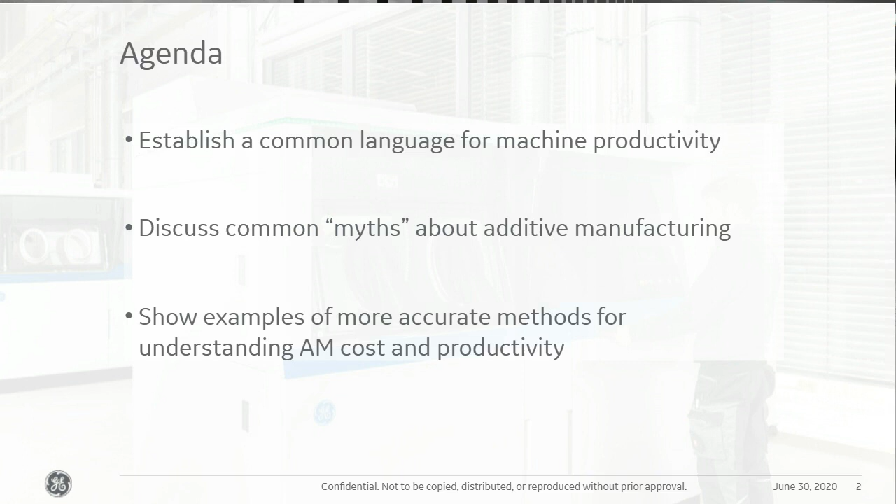So we'll start with a high-level view of the entire discussion. At the end of the day, everybody's here because they want to understand how to create a viable business case using additive manufacturing. A business case can be defined as the justification for making any type of investment, and ultimately what the commercial consequences are. Is it profitable? Does it open up market space? Does it create opportunities that you otherwise didn't have in your current business arrangement?

Those business cases are the thing that we really focus a lot of our attention on, but they're really constructed of sort of 3 to 4 major components. And so ultimately you can see here, at the root of it, the core of building a successful business case really comes down to your cost estimation. Coming up with a very accurate predictive model for the cost of additive has been the subject of a lot of discussion and debate for at least the last 5 years, if not much longer than that.

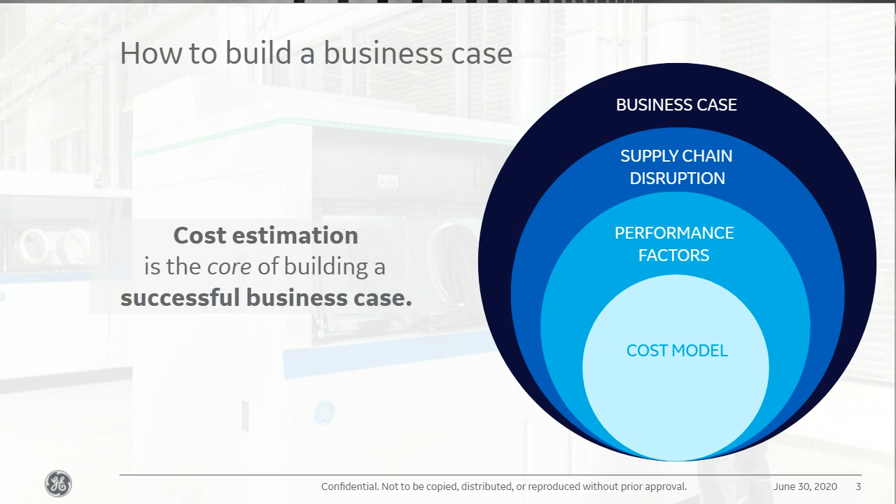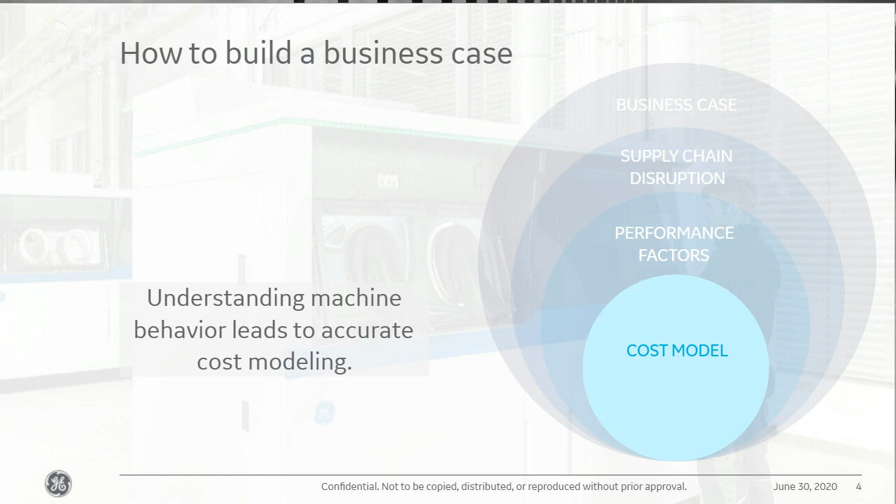So we start at the core. The cost model really is a simple accounting exercise where we take into consideration what the machine is actually doing. This is kind of the open secret about additive manufacturing, and this is true for a lot of things outside of additive: machine behavior is one of the things that really dictates how to estimate your cost. Similar to human economics, we focus on consumer behavior. In the case of machine economics, we talk about what the machine is doing. That's one of the major takeaways of today, and we'll dig much deeper into that as we go.

So let's say that we have a cost model that we believe in the results of, it's been verified, and we have a very complete, comprehensive model. The next thing that we really want to take into consideration are the performance factors.

Ultimately, this can be things like producing a brand new product with new capabilities. That would be, in the case of a derivative, sometimes you can have derivative savings as a change in a product happens. Something in aerospace that we commonly see, for example, is weight. There's a premium paid for weight, and if there's a way to optimize on that, you can actually derive substantial direct cost savings.

But another common thing that we do with additive is we actually increase the life of components. That increased life has a lot of consequences on what your downstream manufacturing and maintenance costs are, and it has a lot to do with changes in your own supply chain if you're able to increase the performance of the part and the life of the part.

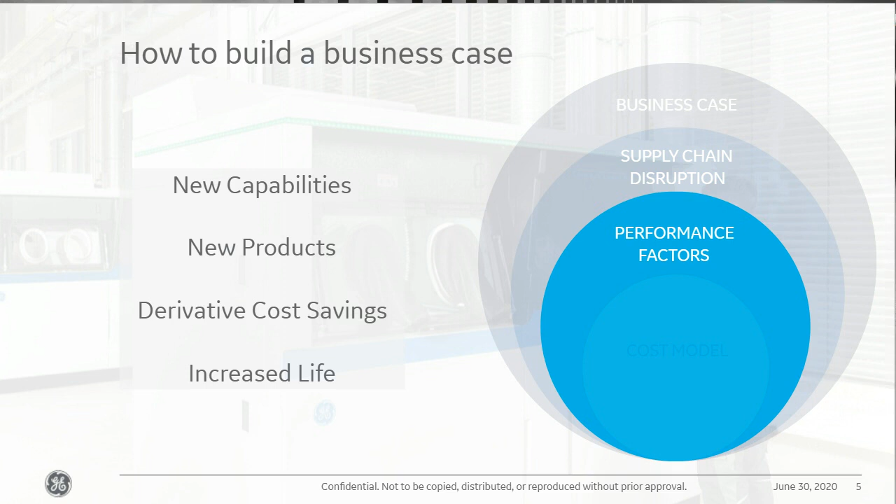Naturally, that segues into a much deeper discussion about supply chain disruption. In the case of additive supply chain, in a lot of ways you're really disrupting the necessity to go out and get tooling made, dies, molds for castings, for example. You start eliminating a lot of the intermediary requirements from the supply chain. You no longer have to go out and source those people, get them potentially months in advance, and have them lined up to actually perform the work that you want to do, especially when we're talking about development.

So another thought here is that with additive, if you do bring it in and decide to vertically integrate, now that you're bringing that manufacturing in-house, maybe you can drastically reduce the scope and scale of your existing supply chain in terms of human resources and capacity.

In some cases, this will be a reduction of warehousing and storage. Sometimes, you've probably read several articles about this, you can actually reduce the amount of obsolescence happening to a product line. You don't have to obsolete products just because you have a tooling piece, a mold, something like that, when the supplier went out of business 20 years ago and you're scrambling to try to find somebody who can replace that component. So additive really can come in and work wonders when it comes to the supply chains for an existing business.

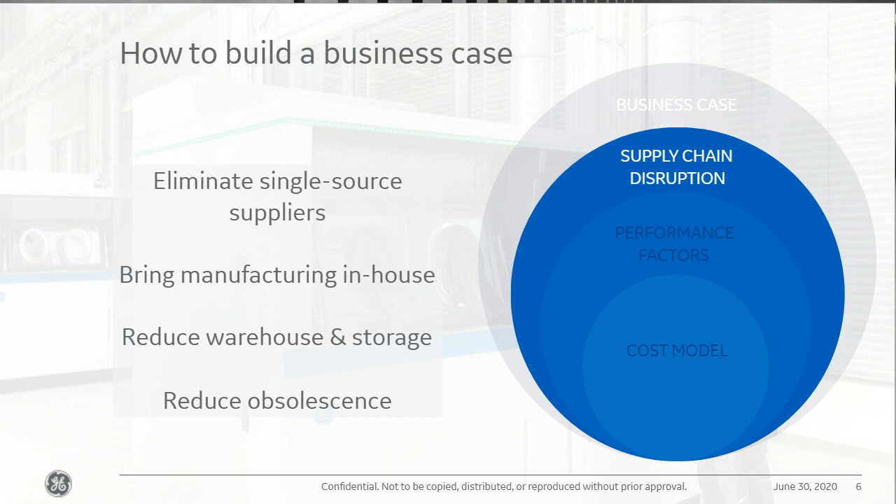But lastly, I think one of the big things we want to talk about is the overarching business case. Why would we even go additive in the first place? It's one thing to say I can estimate my costs pretty well, I can understand the performance changes I've made to my parts by going additive, I can even talk about the substantiation of my supply chain and the changes made there. But ultimately, the business case hinges on what you can do differently from the highest possible level.

So in this case, maybe additive technology is going to be something that puts you into an entirely new marketplace. In some cases, you can actually construct different business models that might be fundamentally different from what you're doing today. In a lot of ways, it'll offer better differentiation, and that's kind of a minimum entitlement. If you've really leveraged additive, you're not just taking a cast part and deciding to print it, even though sometimes that is exactly what you want to do. In many cases, to really get that immediate benefit, you start from the design and work your way up.

So by creating that product differentiation, does that make you more competitive? Does it take you from competing in a red ocean, getting more into a blue ocean, paving the way for new industries rather than simply competing in your current market space?

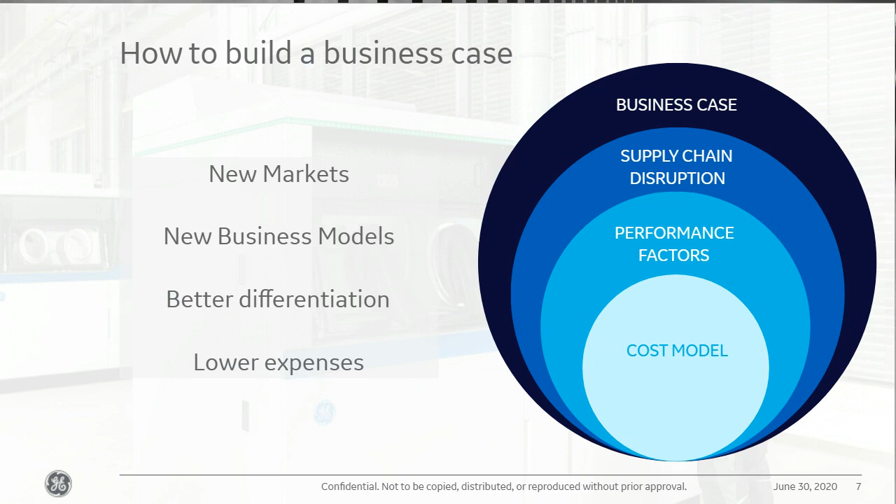So we'll talk about some of the additive machine metrics that you might want to keep in the back of your head throughout this presentation, but ultimately this is something you'll probably want to think about as you start building out your business cases.

So the first one is build time. You'll hear a lot more about the influence of build time on your cost predictions later today, but we want to set the stage and say there's a summary of all these different events happening at the machine that contribute to your overall build time. It's really the summary of all the different scan times that happen on the machine, and that's another deep topic we could cover in another hour. But when it comes to all the different ways the machine actually behaves, we have to sum all of those together and characterize them.

But we also have to do the same thing with the way the powder or filament or anything being fed into the process is being processed. So in the example of DMLM, that could be something like the time it takes to actually recoat each layer, depositing a new fresh layer of powder before you begin the scans.

And ultimately, there are pauses in the process. That's something a lot of machine OEMs are working to eliminate, but sometimes you can't, and sometimes having an induced pause actually results in better part quality. There's a lot happening from a thermal perspective, layer by layer. Because it's a melting and solidification process, there is a transient which requires some time, so sometimes you want to use the pauses to your advantage.

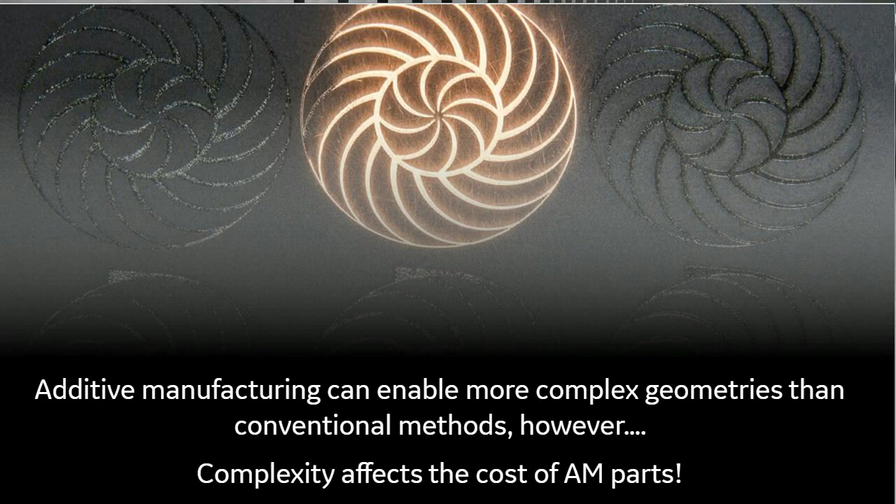So if we really think about it, additive manufacturing can enable more complex geometry. In fact, just point blank, you can print things that you can't make any other way, and that in itself is a super powerful thing. It's something that if you leverage it right, that is the thing that pushes you into a winning business case. But one of the major things to really think about is that the cost of complexity with additive manufacturing does go up as the part becomes more complex. So even though it may absolutely be much more competitive than a traditional process, complexity does contribute to the final part cost when it comes to additive manufacturing.

So we'll kind of walk through some examples here. To try to explain why complexity contributes to the part cost, all additive machines - and this is going to be true for every process, and it's true beyond additive as well - most machines are really just a set architecture, and then they receive a set of instructions on what to do from, for example, a G code or some other type of method where you're inputting the instructions in the machine.

So in this case, we'll refer to them moving forward as themes or parameter sets. You'll hear that commonly if you've ever worked with GE Additive in the past. But those parameter sets and those themes are the thing that really determines how long the machine actually operates. So there's also another side of this - what the contents are of those parameter sets, they derive all of their instructions from the CAD model.

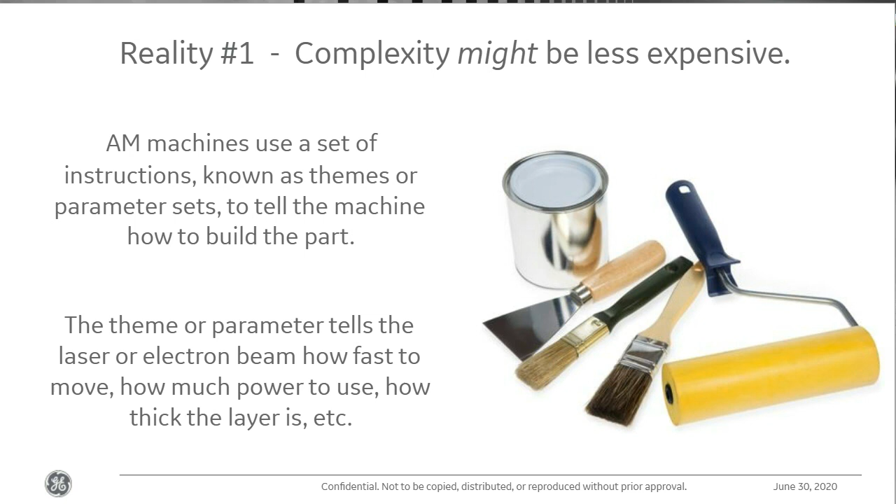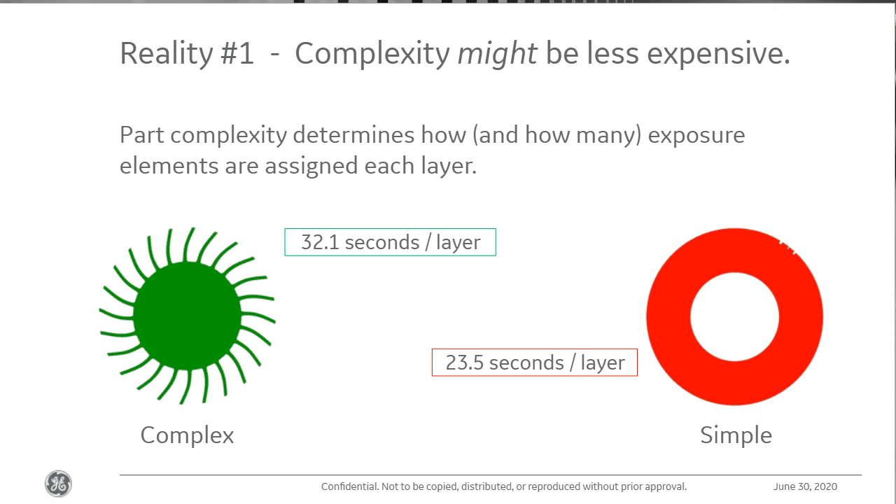So if we think about how complexity is really driving build time, there are at least two major geometric considerations. This is something you can work on at the CAD level, but it's also something you can take with you throughout the entire process. More surface area means I'm exposing more of these contour shapes, or in other words, the more surface area there is, the more I have to pass a laser around the edge of the part. And there's a reason why we do that, and we'll talk about that on the next slide. But if we're talking about really bulky geometry, that's associated to the volume of the part.

So one kind of nice objective way to measure complexity is just a ratio of these two things. If you want to define complexity, this is a great place to start, because you're going to capture how much of the process is biased toward my fine detail, edge pass, high resolution type brush, if you will, versus how much of that is assigned to the roller style brush. So how much faster can I deposit my material?

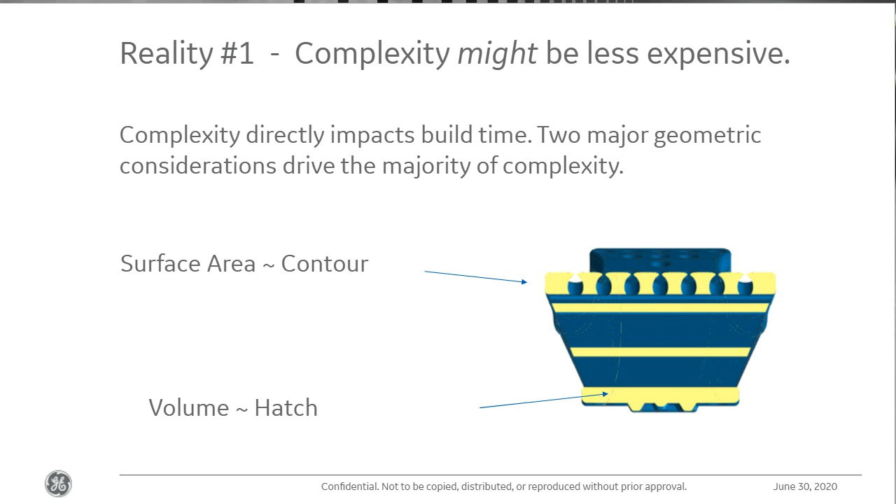So we've talked about the hatch and contour. There are actually up to 24 other exposure elements that happen, associated to different geometry implications, and in some cases, not just the geometry itself, but the interpretation of that geometry. So now we're talking about part nesting, and part orientation, contributing to how complex the geometry is on the slice level. This is kind of an interesting spot, because now we're saying there's actually 24 exposure elements. This is a really difficult problem. How do we really try to understand the implications?

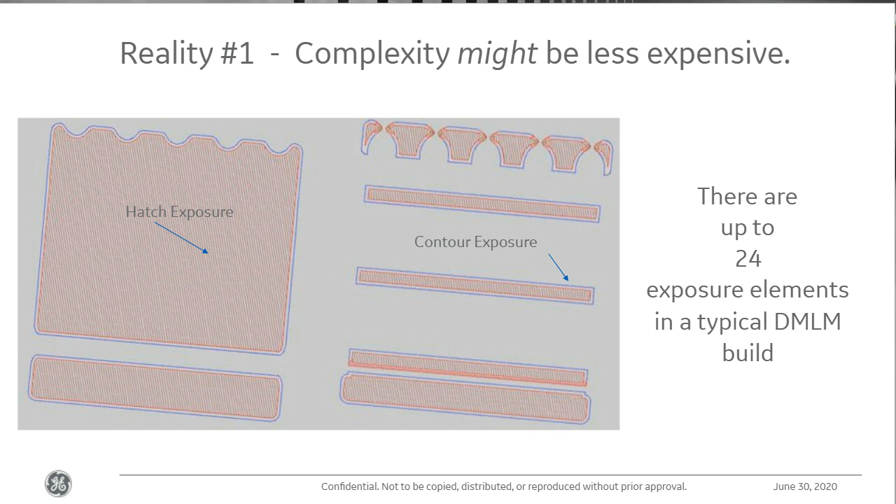Well, say for example, maybe I don't want contours. I see a bunch of surface area, I say, well, what if I just turn those off? Well, you can do that. You certainly can, and there's going to be a bit of an implication, and it's really going to come down to the quality of the surface and really the material fidelity.

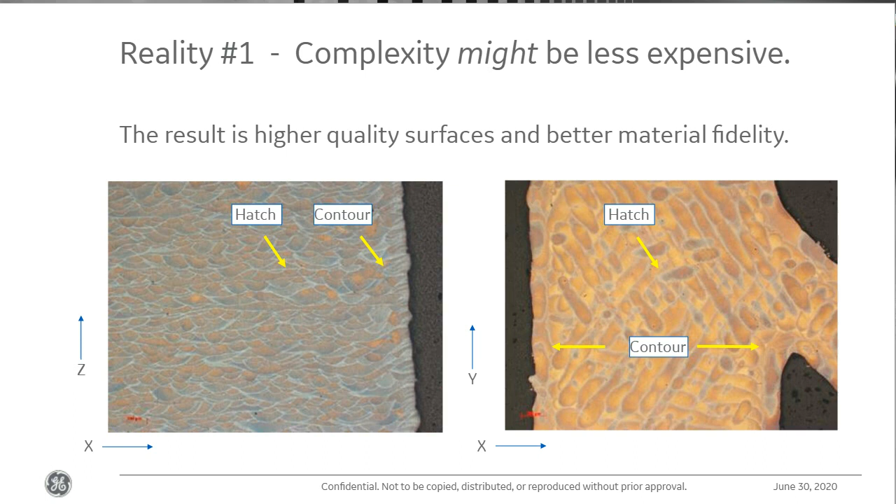If you wanted to make the trade and eliminate those, you can certainly do so, but you should expect that if you start eliminating exposure elements, you're just going to see a reduction in material capability. So most of the time, that's going to manifest itself in terms of fatigue, or in some cases it might be creep. Anything where you have a surface induced phenomenon, you're going to propagate a crack off of a surface. That's what you'd be working with.

So kind of the summary here is that complexity could be less expensive. And it normally is when you're talking about things like a complex forging, casting, machining, something where you're fighting complexity versus a conventional process. But you don't always win with additive just using everything stock parameters, stock machine configurations, that kind of thing.

In some cases, you can really push the business case over the edge by utilizing a combination of reduced material requirements, changing your material parameters so that you can create something that's a little bit more productive, if your industry allows for it. In some cases, the quality is the part that really, really matters, in which case you just have to take into consideration that there is complexity that's going to be inherently in the part, which means that you're just going to have an inherently slower process.

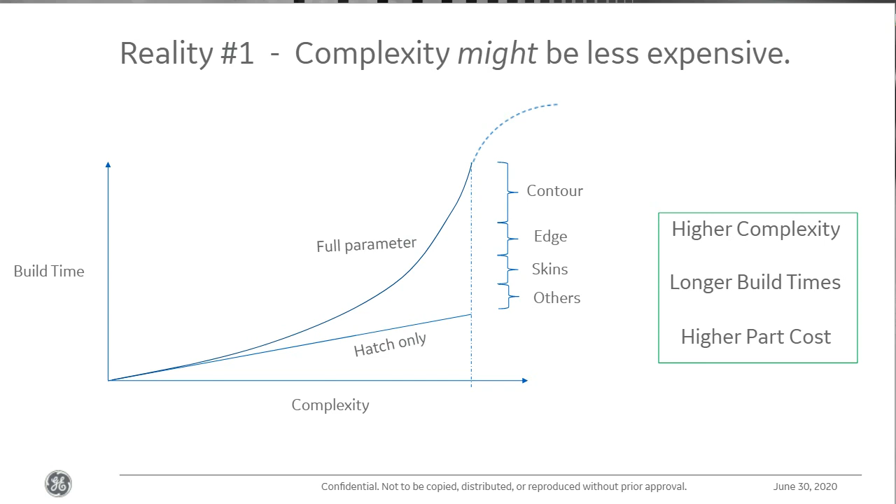Thanks, Nick. All right, so great examples on complexity and understanding whether or not complexity is free, and what that phrase or that myth means. The next phrase or myth we're going to look at is: my machine prints at the quoted entitlement. True or false? My machine prints at the quoted entitlement rate.

So let's take a look at the result for this poll question. A little bit different than the previous here. 14% said true and 86% said false. So once again, Nick, I'll ask you for your thoughts on the results of the poll question.

Yeah, once again, I think we might have a lot of experienced users that have probably run into this problem themselves already. But the quoted entitlement rate in a lot of cases can be something as abstract as simply what my scanners are capable of producing. In which case you're going to see numbers that appear to be super large, and if you're comparing the wrong thing across different machine vendors, different machine technologies, it can be a little bit misleading. And so I think that's one of the major things here - people who understand that this is false, if you've experienced the machine, you've set them up in your factory, you've run them, you've probably already hit this.

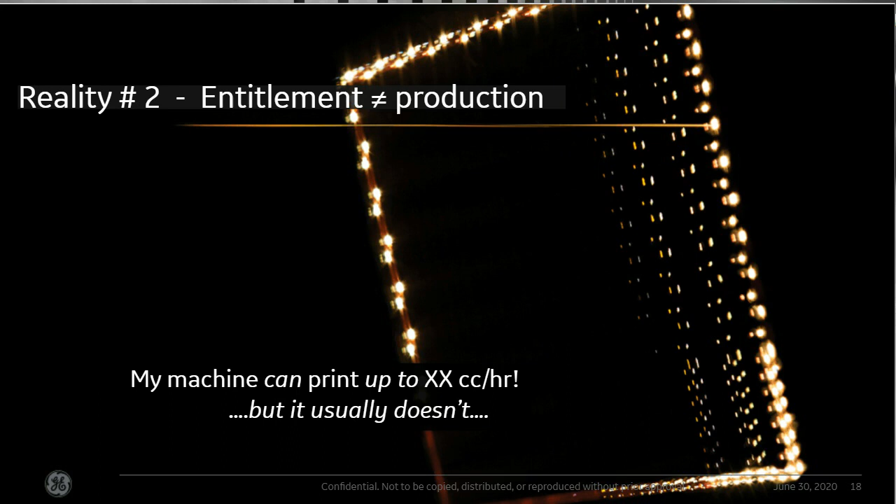So reality number two: entitlement is not the same as production. And that's a sensible conclusion, but let's dig into why, what's really driving that. So you'll often hear a metric - this is in a lot of marketing literature across the board, and it's also a metric that has been used substantially for probably the last decade in additive. But we're talking about a volumetric deposition rate, CCs per hour. So you'll have a lot of people say, well, my machine prints up to 60 CCs per hour. Well, if we really think about it, it can never actually really print to these entitlement speeds.

So if we go back to our definition on OEE and start to analyze what are the contributing factors, or how should I evaluate a supposed maximum machine productivity speed, and how do I tie that back to what my ultimate performance metric is.

The overall equipment effectiveness. When we're talking about availability, we're talking about things like how many shifts do I actually run in my factory, how long does it take to empty the machine out, take the printed parts out, reload with powder, and restart the machine. Or how long is my machine going to be down for different types of maintenance issues.

So that all kind of speaks to the quality of the machine itself, but it also speaks to a lot of economic choices that you have to make as a business making the evaluation. You're factoring in your facility overhead rates, and maybe you only have one shift operational because you just don't have the people available to actually run the machines.

If we're talking about performance, this is kind of the big one. This is the one that's going to lead to a lot of the confusion and frustration about adoption of additive. So we're talking about what material parameter is actually being used. As we discussed before, there's all these elements that create that set of instructions the machine is reading. So which one are you actually going to use?

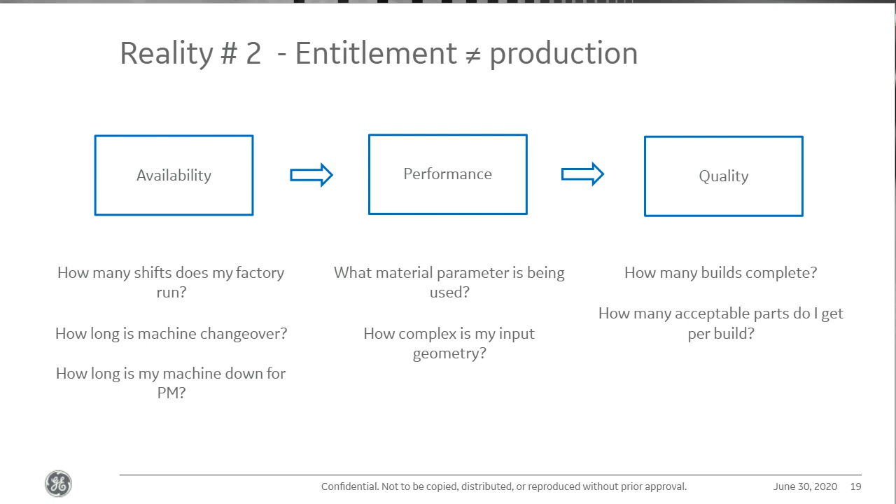So I have an example here. There's 16 parts, just a random arbitrary part, built in 316L stainless steel. We've only enabled just the hatch elements, so as you saw on the previous slide on that graph, we're just writing that hatch line. And I have two lasers working all the time, so this would be considered probably a pretty highly productive scenario. I have the simplest exposure, the simplest parameter set that I could possibly have, and I have both of my lasers working at the same time.

So with deposition rate, you can kind of see here, 62 CCs per hour. So that's a pretty fast rate. So what happens when I start to change the scenario around?

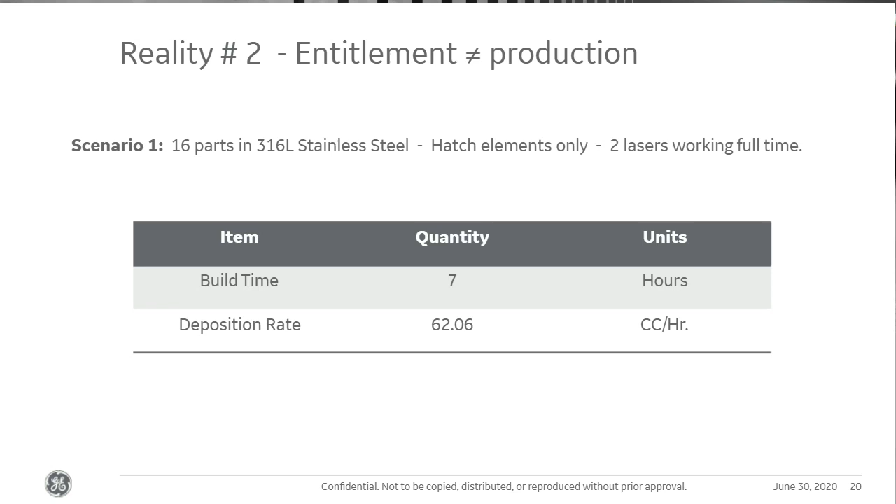Well, if I'm looking at hatch only, you can see the picture looks actually a little bit blurry. This is actually not out of focus, this is just the way the surface looks. It doesn't have very well-defined lines. It looks blurry, it's very highly refractive of the surface, so you don't really see any of the shine that you would expect with a typical metal.

But on the right-hand side, if I have all of my exposure elements there, you can actually see very crisp lines, good detail on the edges. You can also see that the surface looks a little bit more lustrous. So you already can see the benefit of having all those extra exposure elements.

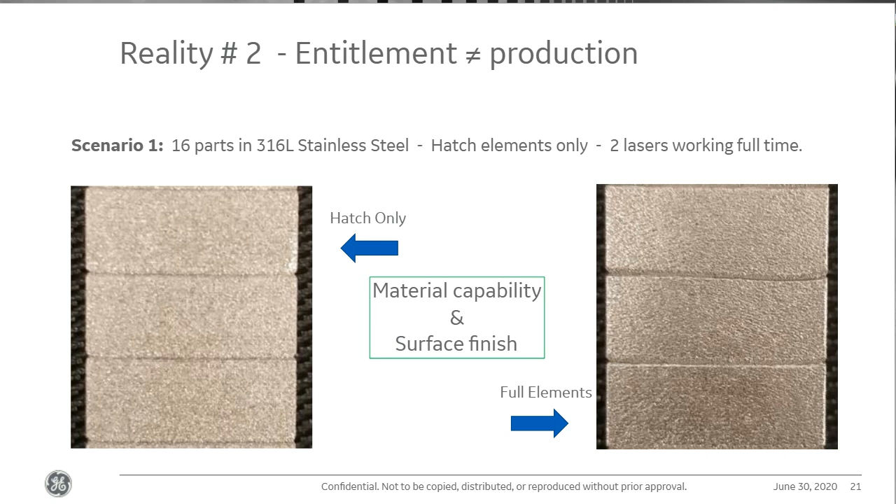So what happens now whenever I turn all of those exposure elements on? Well, I get the better part that you saw on the right, but I see a pretty substantial change in my build time and my deposition rate. Before it was 62 CCs per hour, but now it's only 14. And so that's kind of the consequence of, if I have part quality requirements that force me to use all of those extra exposures, and I have a part of moderate complexity, it can have a pretty substantial impact on my total throughput, and that's something that we factor into our ultimate business case.

But if I further change the story here, now I'm only going to use one laser at a time. Let's say for an equivalent set of inputs, I'm unable to use stitching. I can only have one laser firing at a time. Maybe in a real-world scenario, a laser goes down, but you still have to be productive until you can repair it. We've taken the laser out of the equation, and now we're down to a mere 7.9 CCs per hour. So there's a lot of things that really contribute to ultimately what your productivity is going to be. We'll get into all of those contributions after the next question.

Thanks, Nick. Real quick, we've had a couple people ask for a description of entitlement rate. Could you briefly define what you mean by entitlement rate?

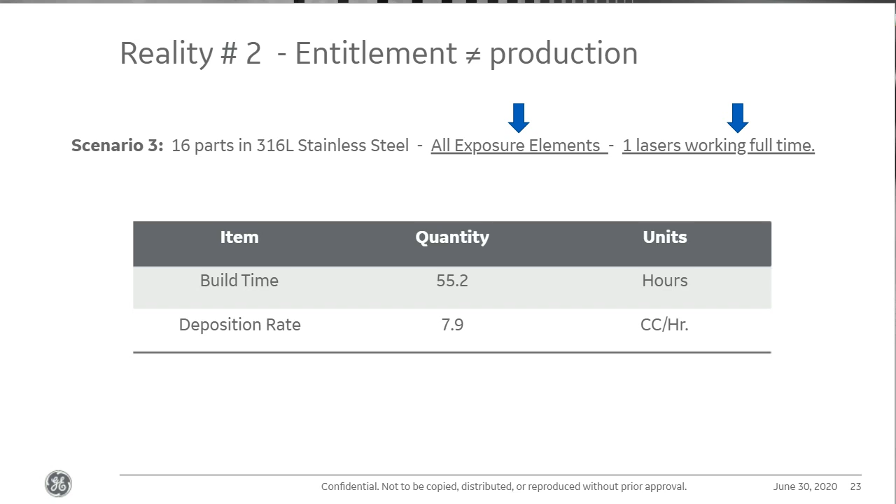Great, thank you. So I think that's a good lead-in to our next poll question, which is: CC per hour is a good metric, true or false? Once again, CC per hour is a good metric, true or false? Curious to see what you guys think. Let's take a look at the results.

Oh wow, so on my end I show 100% of the audience selected false. Nick, what are your thoughts on this? That is actually encouraging. You guys all, I think, understand the issue with CCs per hour, which is fantastic.

It can be useful in some contexts. Overall, when it comes to establishing a business model, it really isn't that useful. And the reason why is actually coming up. So CCs per hour, or any type of volume metric, is just associated to mass somehow. You can take weight, you can take volume, looking at it just from a mass perspective. That metric is really good for specific deposition rates, but the key word there is specific.

So CCs per hour is directly associated to the three primary influences of additive manufacturing: the input geometry, the material, and the machine. Everybody here, I think, understands CCs per hour is kind of a tricky one, because just because I have a quoted CCs per hour rate doesn't mean that the machine operates at that across the board. It makes it really hard to use that as a metric to evaluate a bunch of different parts in a given machine. It makes it really hard to evaluate even the same part and geometry if you have different materials that you're experimenting with.

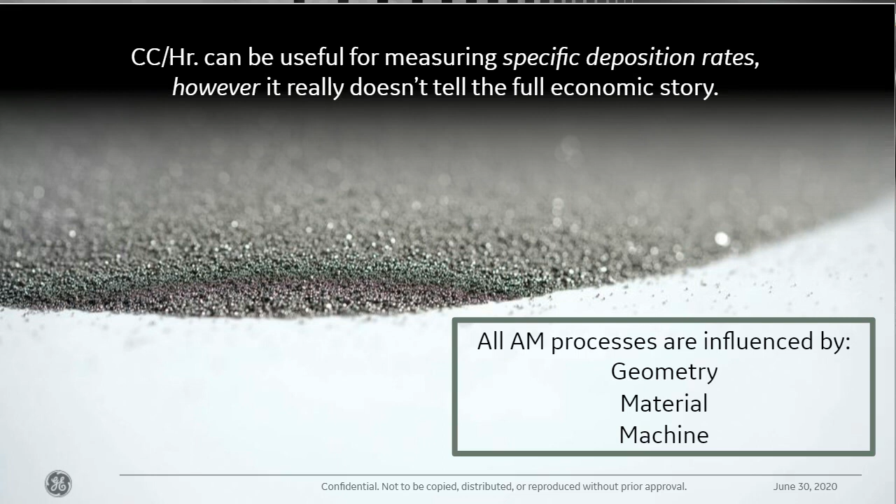Because it depends on all of those things, this number changes constantly, and it's really difficult to use in practice. So one of the things to think about here, in terms of setting the stage for evaluating better metrics, because CCs per hour doesn't really work, and we all know that - but if you think about it, it's kind of like having a foundry in a box. There's a lot of processing that happens in the box, mostly in a mechanical digital format that really replicates and replaces a lot of the activities that happen in a typical foundry.

For example, in a foundry, you have all the melting of the material. I've got to transport it from an oven over to the area where I'm actually doing my pour. I have to have the tooling already created in place. Not to mention if I have multiple different types of castings, forgings, extrusion happening in my facility, I've got a hard job trying to discern how much of that overhead rate is associated to the machine activity, to the process activity, and ultimately how much of that is just wasted cost. So if you think everything is happening in the box, you have an operator who has to physically interact with the parts to load the powder, take the parts out, reload the powder.

In some cases, in a fully automated system, you don't even have a person making contact with the powder at all. Everything happens in the box, and what's nice about that is that all the activity of the machine is in a controlled, documented process. Also, the source of the laser power, the inert gas, everything else going into that can be measured directly in the box as well.

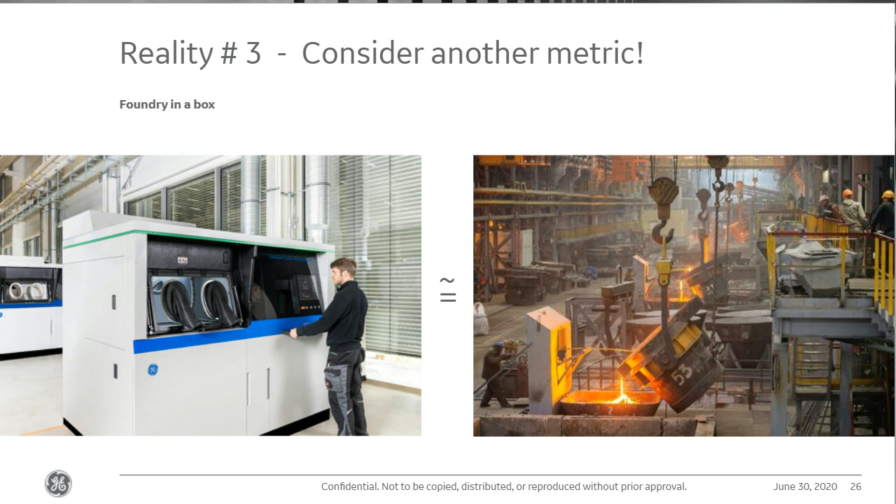So this is a nice way to set the stage for how I might look at the metrics appropriately.

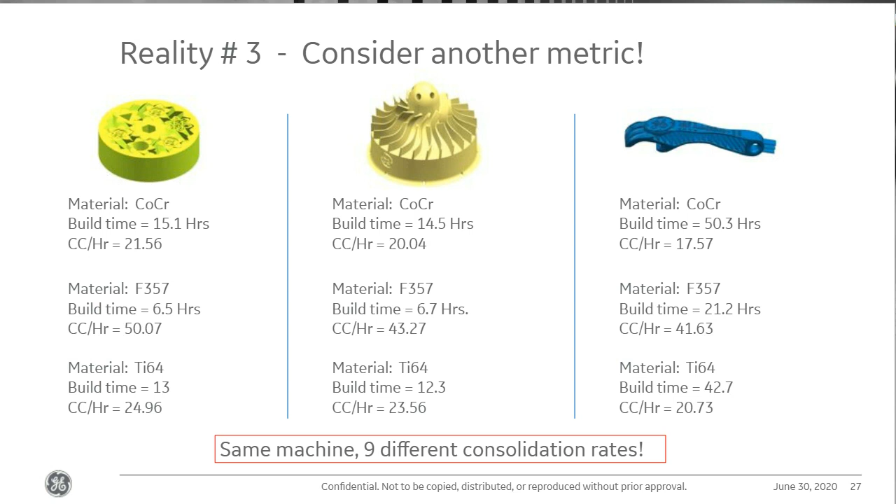But you can also see material selection makes a huge difference, and that's sensible—if I change my material, it behaves differently. Steel and aluminum behave very differently. One wants to melt nicely and is easy to weld; the other wants to immediately suck heat out and reflect the laser input. When you talk about actual material considerations, those are real-world physics you can't really get around. You can make minor improvements and tweaks.

You can have some materials close to parity—for example, cobalt chrome or nickel alloy. These are fairly similar in behavior, at least on the AM level, so their build times are relatively similar.

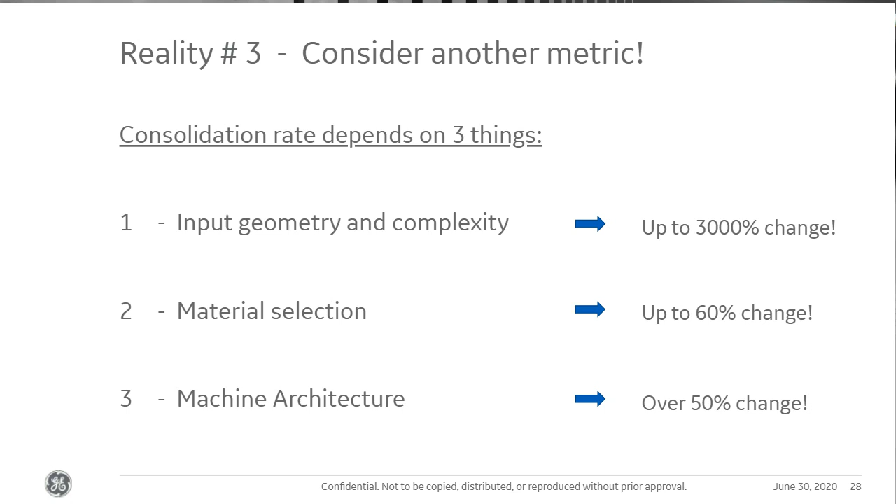So you'll commonly see a lot of processes right now with up to 4 lasers. There are a few systems that do more than that, but you won't see a lot of difference there in the short term, because there's so much more to gain in terms of education on the input geometry, how to design for additive, and ultimately material selection.

So I'll walk you through a few other examples real quick—cost per volume, so this can be the dollars per cc type metric. If we're talking dollars per cc, it's a good way of establishing how much work is actually being done on the input material.

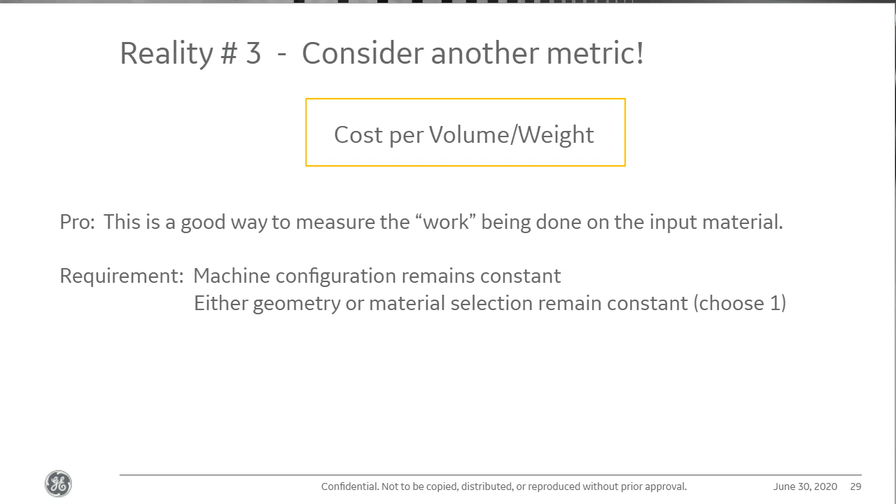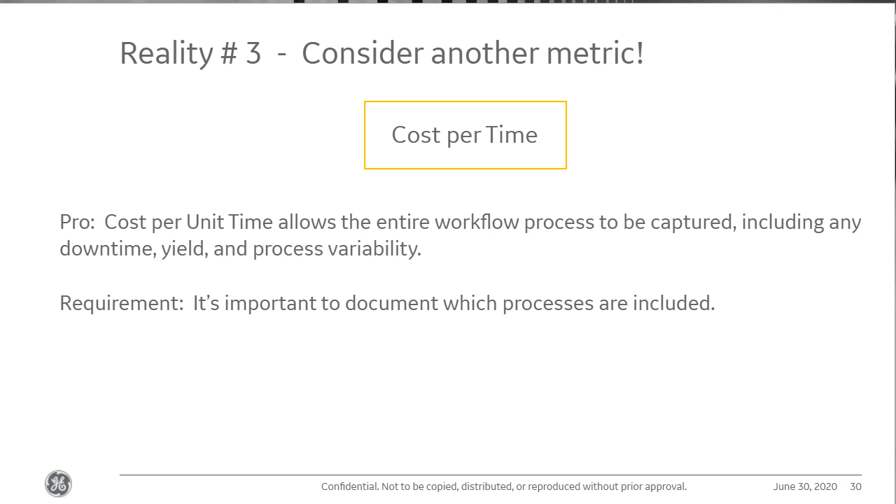Whereas something like a cost per time can be pretty useful as well. But the difference is that I'm almost looking at it from a premium, how much of the additional downtime yield, including all of those other aspects into this. It can be super useful, but maybe not necessarily the total winner.

I hope this is not a shock to anybody, but the best metric that we found to use truly is just the dollars per part. The reason why is because that's kind of the final summary of all of the inputs to the process, and it's independent directly of the input geometry and materials. Clearly it'll change as those things change, but it's not as intimately tied to it as something like a CCs per hour or a deposition rate might be.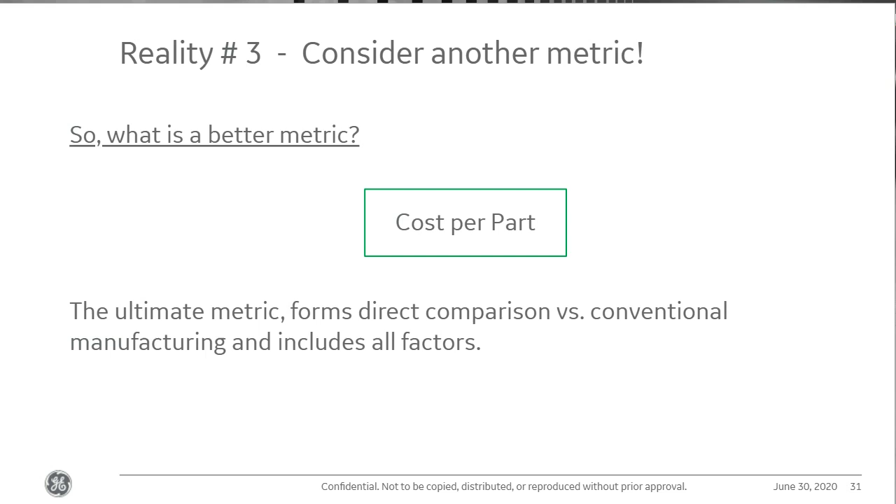So we kind of put all of this together, the combination of all the different changes that you can make and how it has a direct impact on your part cost.

If I look at the three primary cost drivers, I have an example here, and you can see the breakdown that we're going to discuss today. There's a lot of different ways to do this, and we can talk about other ones at another point. But we're going to look at the materials being input, the labor assigned to it, the machine itself and its cost, and the consumables. This would include all of your electricity, inert gas, recoater blades, build platforms. We'll include all of those things. Ultimately, we're going to include heat treating because that's part of the final requirement for this part, in this example. We'll also include maintenance and any other post-processing costs. In this case, there was a surface finishing cost per item of about $22.

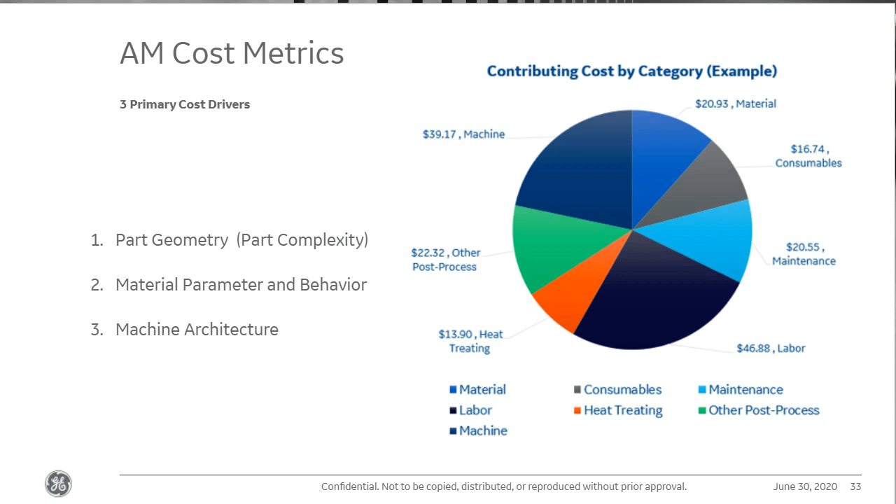On the left, we have the same chart you just saw, a relatively complex geometry. But I went in and simplified the geometry pretty substantially, cutting the surface area down about half. We went through the analysis, and the part still functioned the way it was supposed to, but we took some of the additional complexity out. You can see here what's highlighted, there is an immediate impact to the machine contribution to that final part cost.

There's also a change in the maintenance and consumables, which makes sense. I've created something with a lower build time, a more productive process because I simplified the geometry, and that had a direct impact on how much of that machine is associated to that build and the direct parts of the process, the consumables and maintenance.

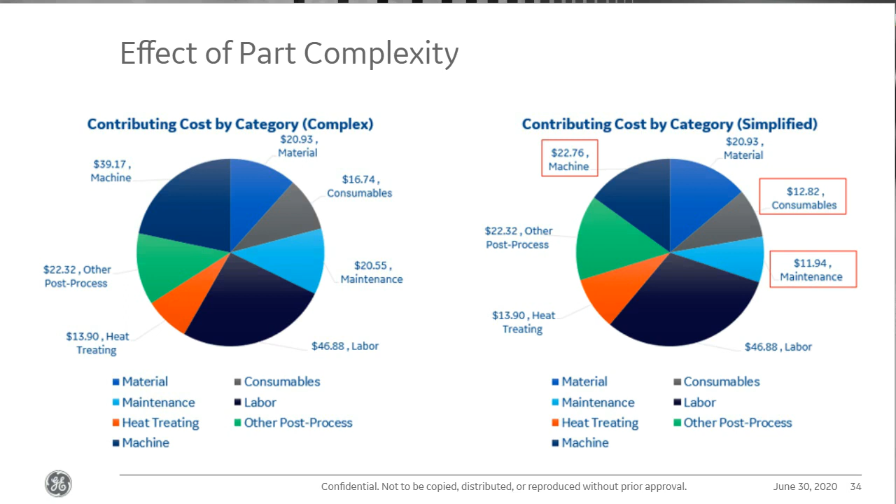So if I take that simplified geometry, which was originally in 316L on the left, and convert it over to F357, you can see another massive implication here. The machine cost associated went down substantially, but also the material cost went down a lot. Well, F357 is much cheaper than 316L.

But we also see that consumables actually went up a little bit. There's a difference in price of the input requirements, changes to filters, scheduled maintenance, that type of thing. You can see the direct impact on maintenance. What's interesting here is that I changed my material to a much faster, more productive material, so if you think back to CCs per hour, it's probably a higher CCs per hour. But it's actually now being dominated by the heat treat costs.

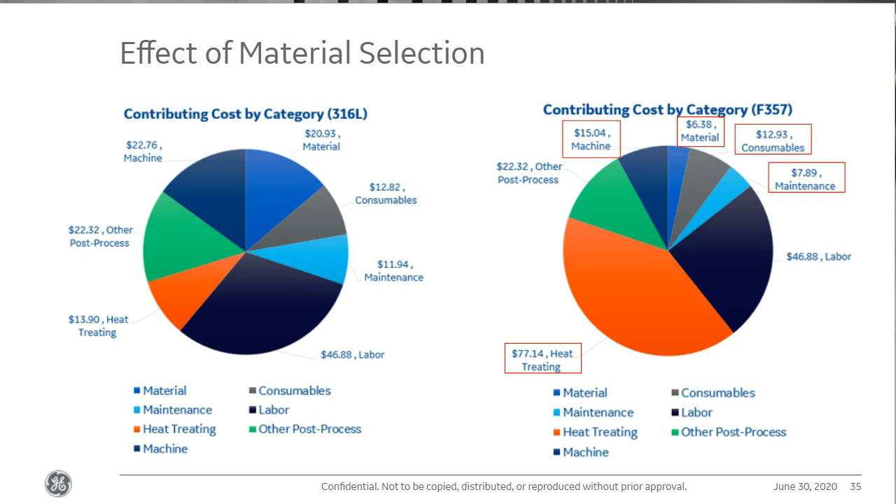And if we take that one step further, previously I was building all of that on one laser. So now if I change the scenario to a dual laser, again, massive implications to the machine, consumables, and maintenance. I'm far dominated now by the other processes that are being accounted for.

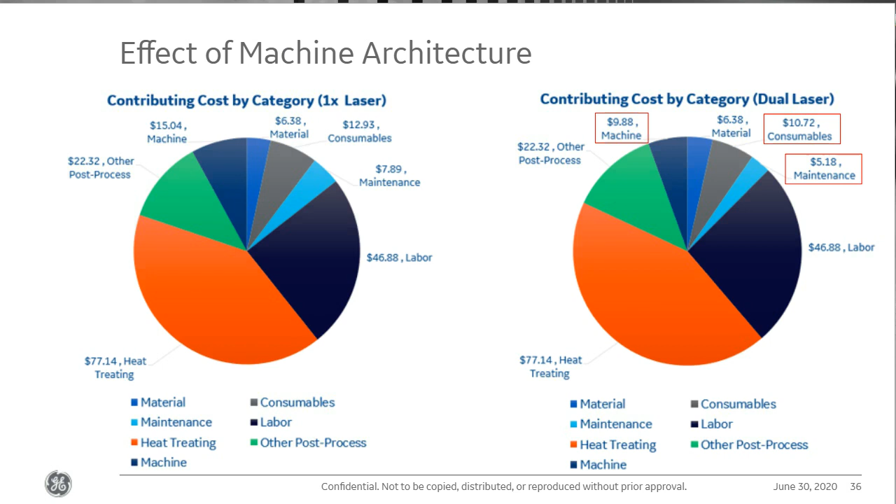So if we quickly look at the metrics and how they actually stack up, you can see CCs per hour actually increased across the entire process. We changed to a more productive material, we also changed to a more productive machine architecture, and we reduced the complexity. But we see this kind of shift happening where whenever I changed to F357, my dollars per CC actually increased, which is the opposite direction that you want to go. Ultimately, throughout this entire thing, I created a more productive process, but I actually had an increase in dollars per hour. That inverse relationship of dollars per hour is going to hold true as long as everything else remains constant.

And so that's an interesting implication, because that's essentially saying that the higher the premium I'm paying for every hour of productivity that I'm gaining, I'm essentially spending more money on the process if I'm measuring it relative to time. So there's a little bit of that time premium that goes on this.

The obvious implication there is you can chase that back down if you start talking about different machine architectures, getting into probably more exotic state-of-the-art development type work. But if we look at dollars per part, it actually went down when I simplified the geometry pretty substantially. It went right back up when I changed my material because my material required a different heat treat. And then lastly, the final reduction using 2 lasers instead of 1 positively impacts my business case.

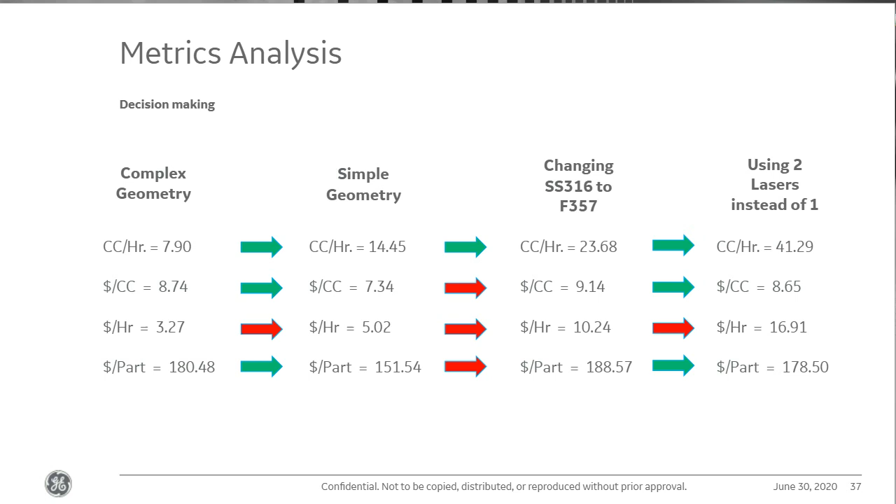And so if you examine the results here, you can kind of see interestingly, CCs per hour and dollars per hour are going to follow somewhat the same trend. And again, that's really associated to a more productive process. I'm spreading less of that full total all-in additive cost across fewer hours, and so I end up paying more money per hour.

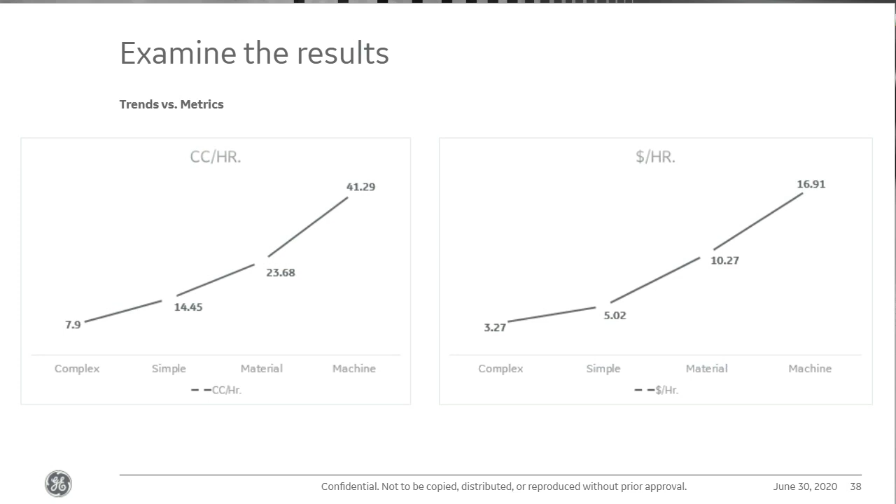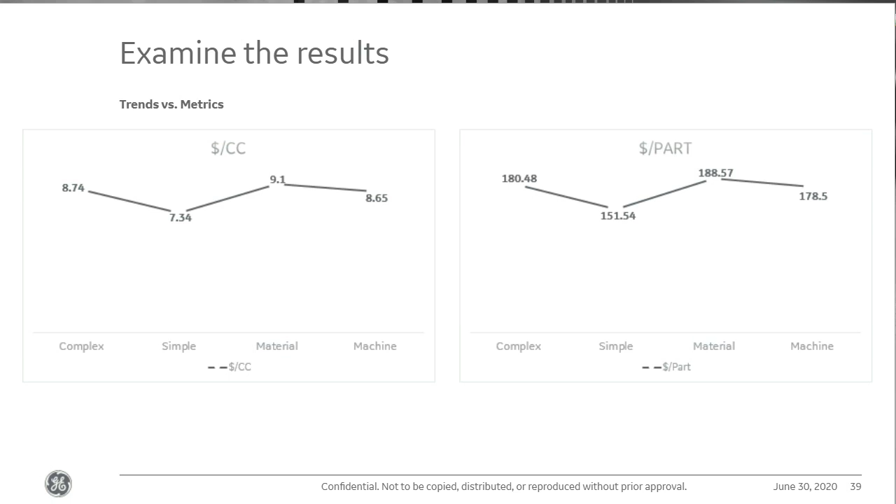So these are really the 4 primary objectives that we're utilizing on a daily basis. There is still a place for CCs per hour, and it's really when you're just talking about pure machine throughput. It's not going to be useful otherwise.

You can't say that my machine produces at 60 CCs per hour. It can, under the right circumstances. It almost never does. It's going to be very specific to the part, the material, the machine architecture.

Dollars per CC is really about evaluating the work that's being done on a given material by a given machine, and the higher that is, the more that I'm paying to convert that powder into a usable part. Dollars per hour is that premium. The higher that gets, the more we're talking about a more productive process. So in some sense, that can be an indicator of a good thing.

And then lastly, dollars per part is the best way to evaluate competitiveness of not just additive processes, but you can compare back to conventional processes as well. The key there is just to be sure that all of the additional post-processing is all together.

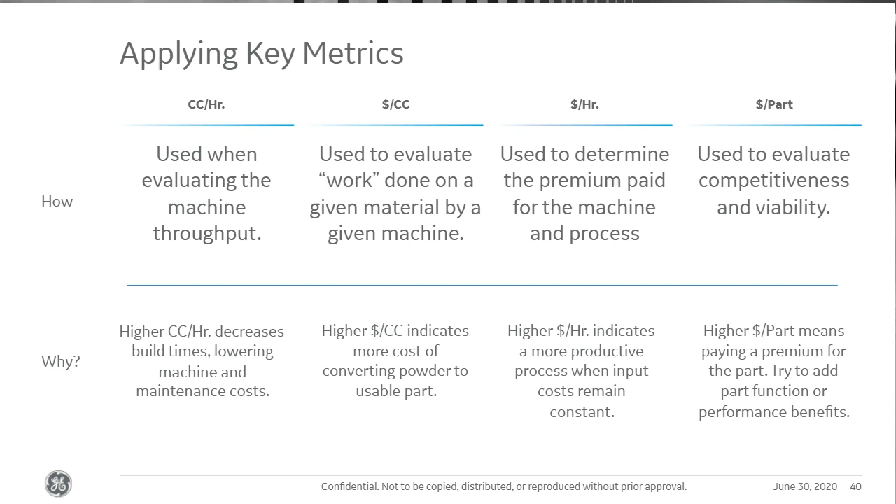So, to really conclude the entire presentation today: don't make something complex just because you can. Additive technology still has a cost of complexity. It's just usually a lot lower, a lot easier to wrap your head around rather than the maybe months of lead time and tooling and all that other stuff that might be associated to a conventional process. So it's cheaper to go additive and go complex, but there is a cost.

Your machine productivity is really the cornerstone to the entire business case. And so the more you understand how the machine's actually behaving - we talked about exposure elements and we talked about the construct of the parameter set, or the instructions the machine's using - that has a huge implication on what your final part cost is going to be.

And then lastly, measuring machine productivity is tricky. But thankfully, nobody here was fooled - you all voted in the right direction. But it can be really tricky, and in some cases you really do have to leverage multiple metrics to really tell the economic benefit. And whenever you're presenting your business case out to investors, to executive leadership, you want to be sure to include as many different metrics that really point to the right behaviors - measuring the right thing is always paramount.